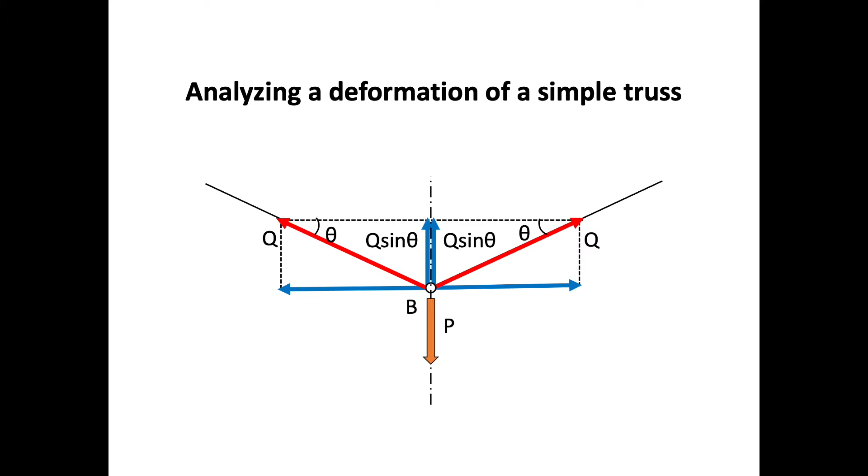Now, we are challenging a simple truss problem. As you can see in the illustration, there are two members, AB and BC. The points A and C are joints at the wall.

The members are free to rotate at these joints. You may recognize these joints are pins to fix objects at the place. Although it may be a bit of a rough expression, you may imagine drawing pins are fixing these members.

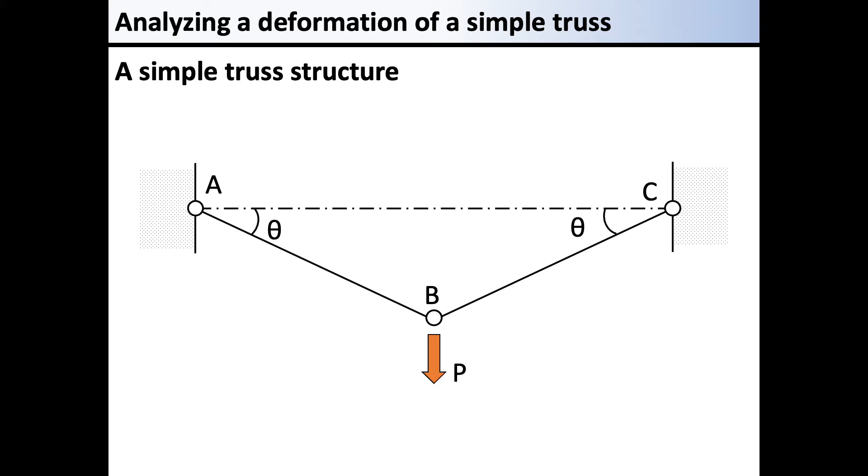If it is not restricted at these points, the members AB and BC hang around the points, and these two members are joined together at point B. The lengths of the members AB and BC, which have common diameter 5 mm and Young's modulus 206 gigapascal, are both 500 mm.

You may note that we are assuming these members are made from mild steel. These members are fixed at the angles of 30 degrees, which is given as theta from the horizontal in the illustration. This is the situation. These two members deform proportional to the load when pulled downward. In this problem, we are asked to find the amount of the truss deformation.

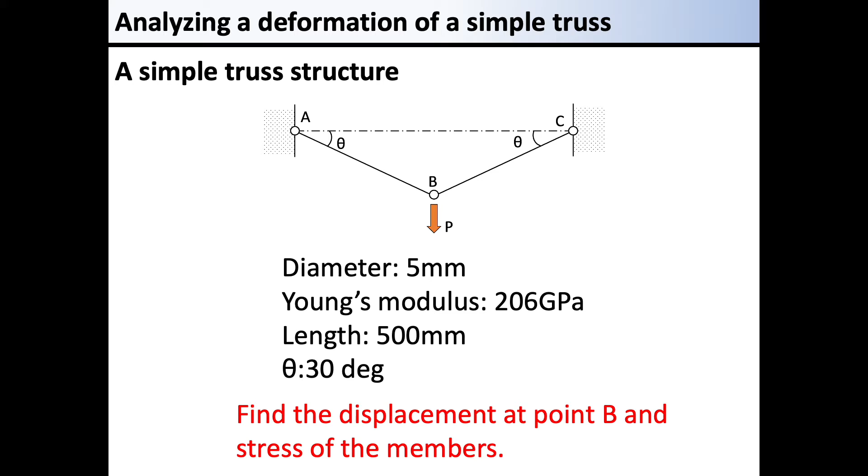A load is acting downward at point B in the middle. In general, it is not always clear which is upward and downward, or which direction is vertical or horizontal. So, we assume that the direction of the load P is downward, and then find the stress generated in each member to calculate the amount of deformation of the truss. These two members are symmetrically arranged, so an equivalent amount of stress should be generated.

The first step is to find the loads acting on the two members. Following the previous explanation, a tensile force applied to a member is positive. So, positive stress values mean tension. Now, the tensile forces on the two members are defined as Q each. Some of you may wonder if the direction of the force Q should be toward the opposite direction. But you should grasp the image of the situation in the following manner.

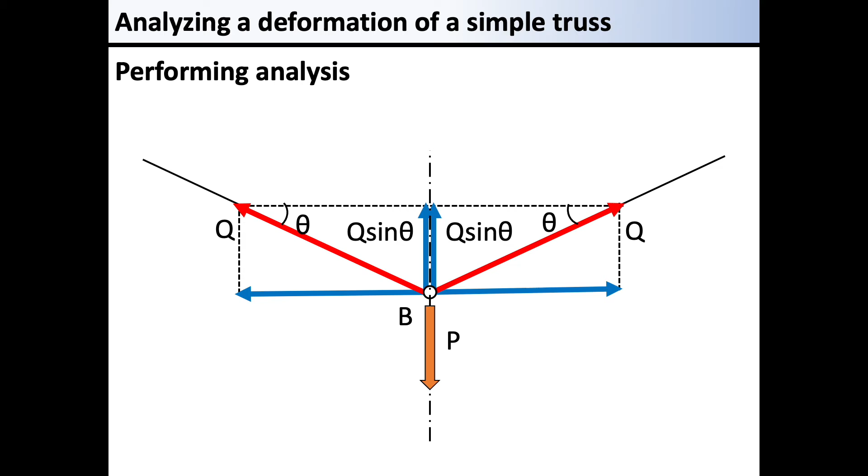The component in the vertical direction is Q sine theta. The Q sine theta is derived focusing on this triangle. So, considering the forces on the left and right side, we get twice Q sine theta. This upward force is balanced by the downward P originally acting on it. The equation describes the balance of the forces. We can derive Q with this equation.

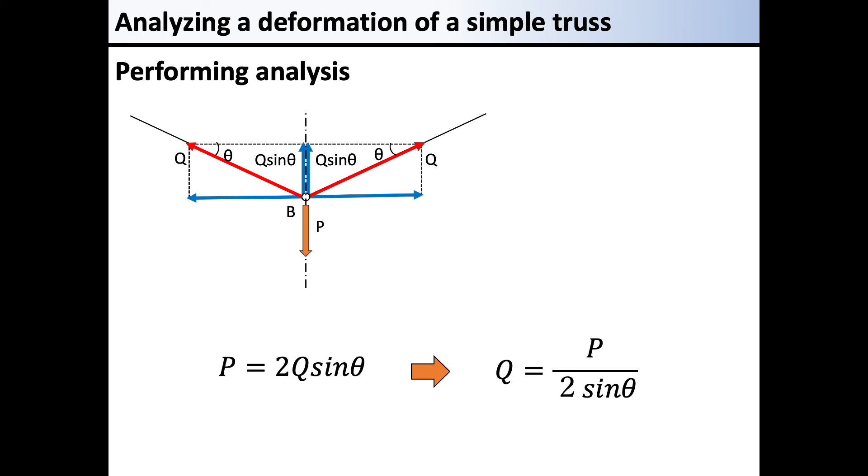You may listen to the following explanation over and over to get a good understanding of the way of thinking. This member is assumed to be very long. Imagine that a very long member is extended by lambda and moved to this location. There is a member BC in the illustration. The member BC, which is very long, is extended by lambda and moved parallel to the original position. You should grasp the image of deformation and movement first.

We assume that the original member BC moves in parallel and deformed to be B'C. You may think it should normally rotate like a compass rather than moving parallel to each other. However, in the case of this problem, where the member is very long in relation to the amount of deformation, the movement of the member can be recognized as almost in parallel.

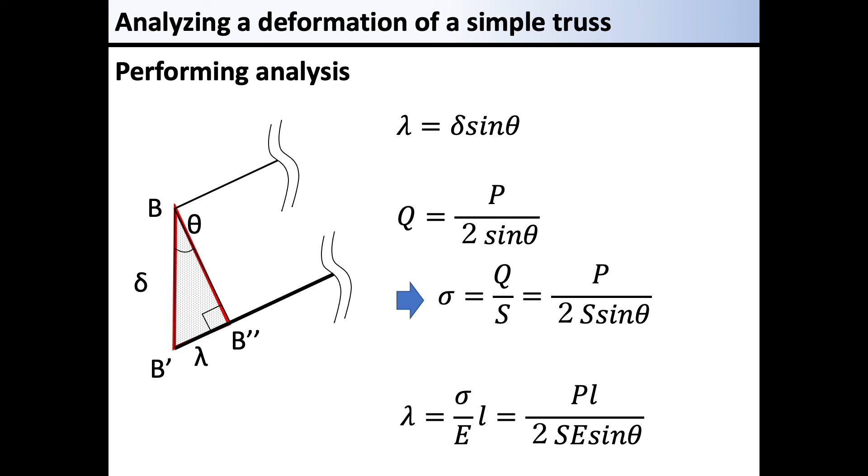Now, we substitute the value as stress to get PL divided by 2SE sine theta as lambda. Then, we are using the relationship between lambda and delta, where lambda is delta sine theta. Now, we are obtaining delta from here. Considering delta is lambda over sine theta, derived from the relationship, we substitute PL divided by 2SE sine theta into lambda. Here, you may notice that the sine theta is squared. And we replace the cross-section area S by pi d squared divided by 4. Then we have now successfully expressed delta with the given symbols.

Now, we are putting the given numbers into the symbols each for calculation. We substitute the circle ratio, the diameter, and Young's modulus. The Young's modulus is 10 to the power of 9, so its unit is gigapascal. Substituting these values, the value of load and the length of the member, 500 millimeters, we get 494 multiplied by 10 to the power of minus 6. As we saw before, 10 to the power of minus 6 is expressed as micro. So, the answer is 494 micrometers.

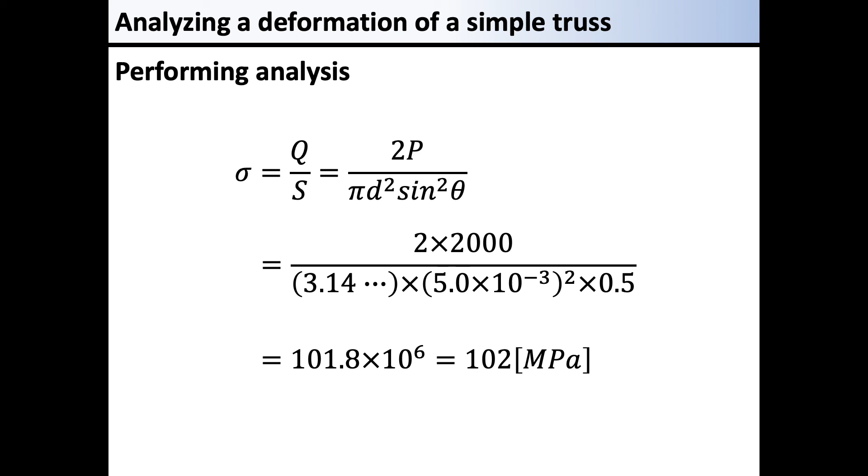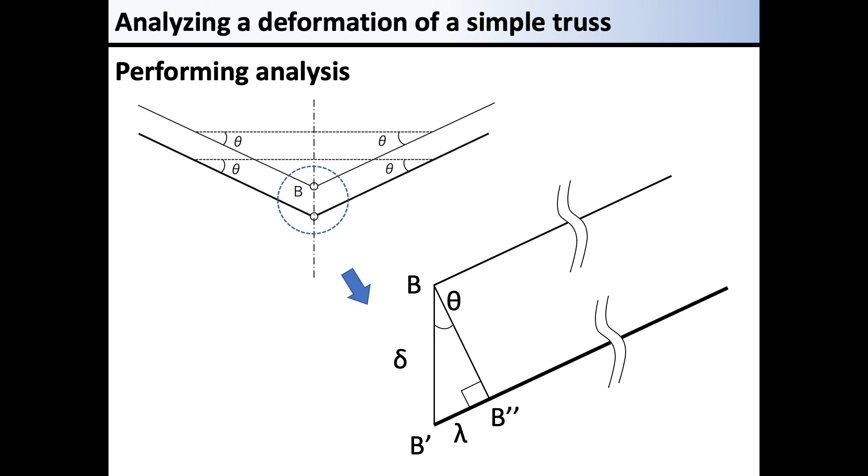Now, let me emphasize a few points on this problem. First, considering that the members are long, we can assume that the truss CB before the deformation is parallel to the position after the deformation. The key point is that this allows us to consider the relationship between elongation and displacement with respect to the trigonometric ratio. I hope you have understood this problem. You may still be feeling uncomfortable about the first assumption that the truss member shifted in parallel and stretched without changing the initial angle. As for this, you may solve a couple of truss problems to get used to the concept.